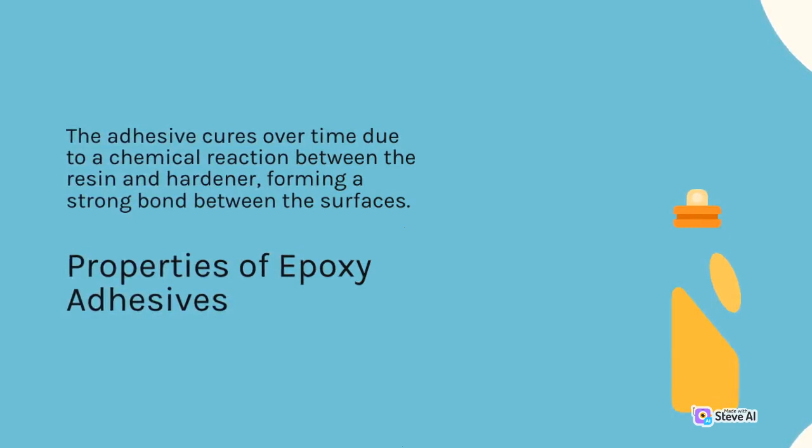Properties of epoxy adhesives. Epoxy adhesives have several properties that make them a popular choice in many applications. These properties include:

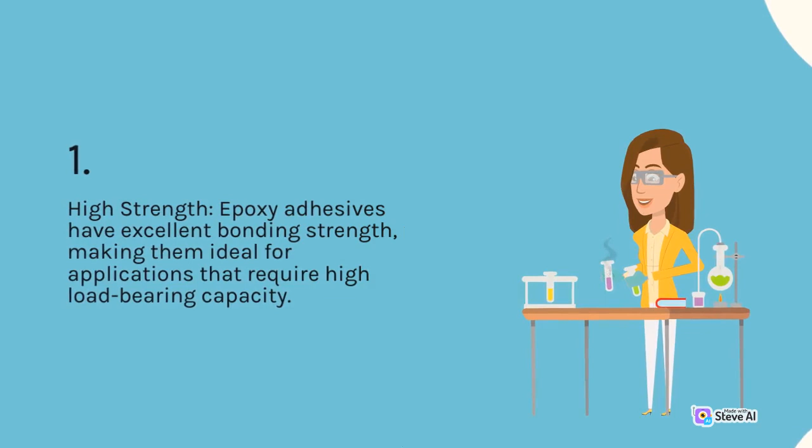1. High strength. Epoxy adhesives have excellent bonding strength, making them ideal for applications that require high load-bearing capacity. 2. Chemical resistance. They are resistant to a wide range of chemicals, making them ideal for use in harsh environments. 3. Durability. Epoxy adhesives are resistant to wear and tear, making them ideal for use in applications that involve repetitive stresses.

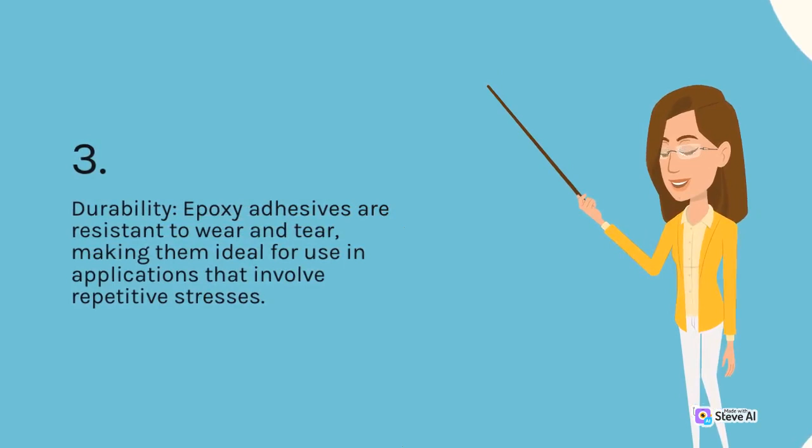4. Excellent adhesion. They have excellent adhesion to a variety of materials, including metals, plastics, and ceramics. 5. Heat resistance. They have high resistance to heat, making them ideal for use in environments with high temperatures.

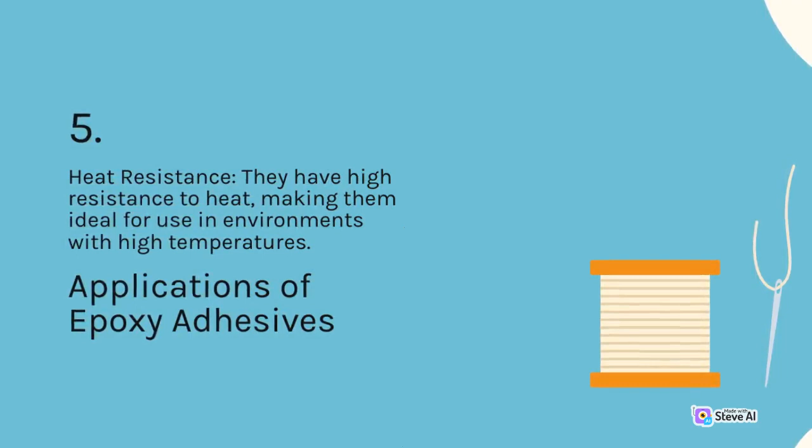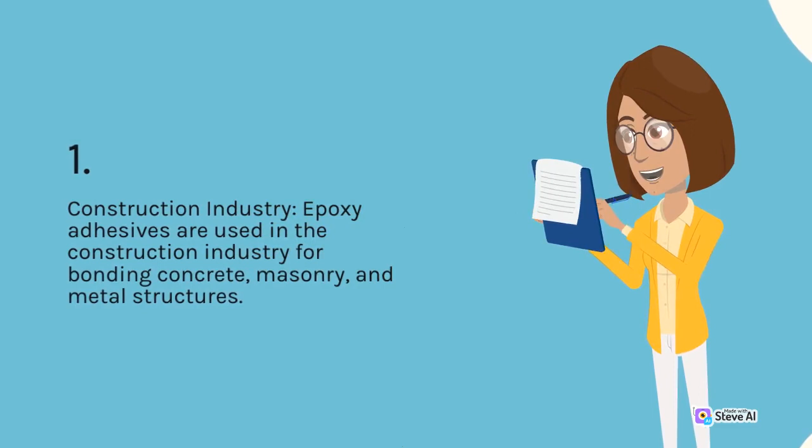Applications of epoxy adhesives. Epoxy adhesives are used in a variety of industries for various applications. Some of the applications of epoxy adhesives are: 1. Construction industry. Epoxy adhesives are used in the construction industry for bonding concrete, masonry, and metal structures. They are also used for repairing cracks in buildings and for bonding tiles and flooring.

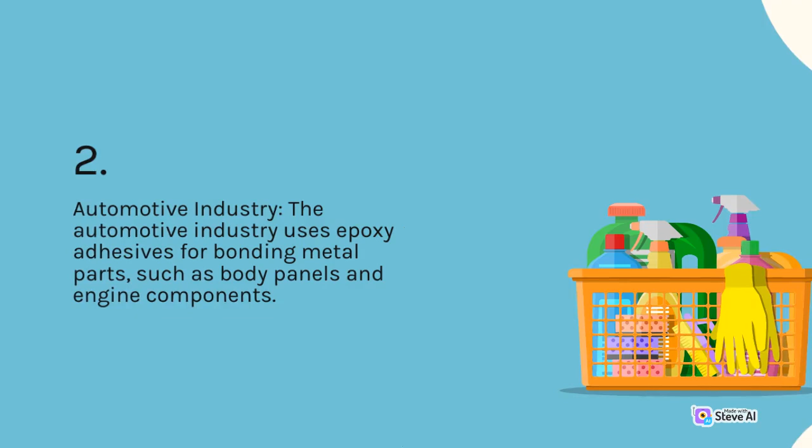2. Automotive industry. The automotive industry uses epoxy adhesives for bonding metal parts, such as body panels and engine components. Epoxy adhesives are also used for repairing damaged plastic and composite parts.

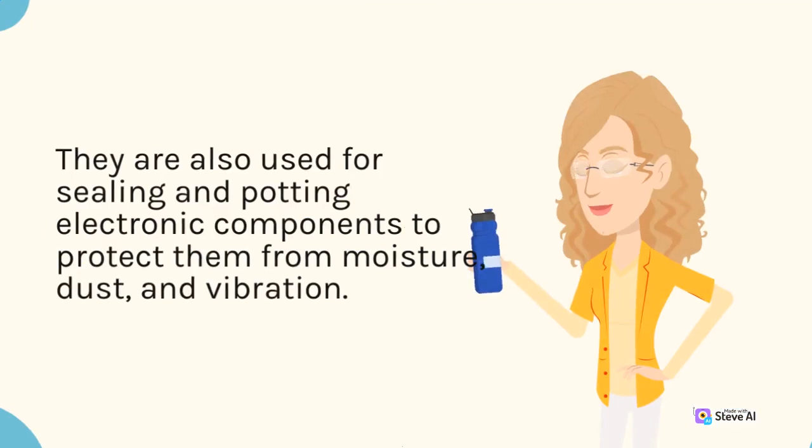3. Electronics industry. Epoxy adhesives are used in the electronics industry for bonding and encapsulation of components and assemblies. They are also used for sealing and potting electronic components to protect them from moisture, dust, and vibration.

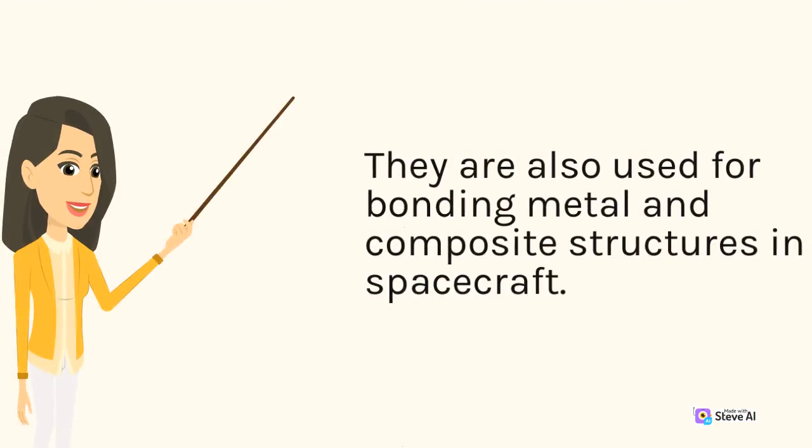4. Aerospace industry. Epoxy adhesives are used in the aerospace industry for bonding and repairing composite materials used in the construction of aircraft components. They are also used for bonding metal and composite structures in spacecraft.

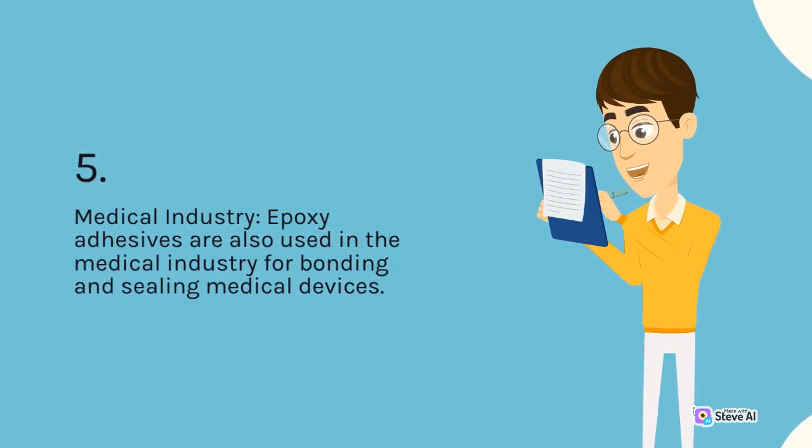5. Medical industry. Epoxy adhesives are also used in the medical industry for bonding and sealing medical devices. They are also used for implantable medical devices, such as joint replacements.

6. Marine industry. Epoxy adhesives are used in the marine industry for bonding and repairing boats, ships, and other marine structures. They are also used for bonding underwater structures, such as pipelines and oil rigs.

Types of epoxy adhesives. There are various types of epoxy adhesives available in the market, which are designed for specific applications. Here are some of the common types of epoxy adhesives.

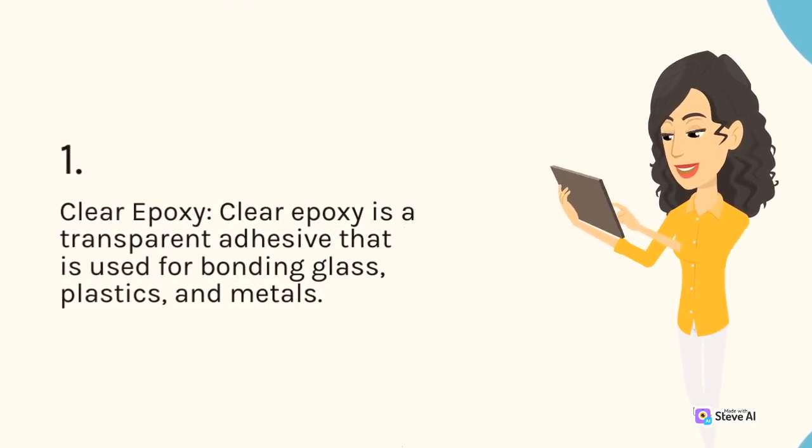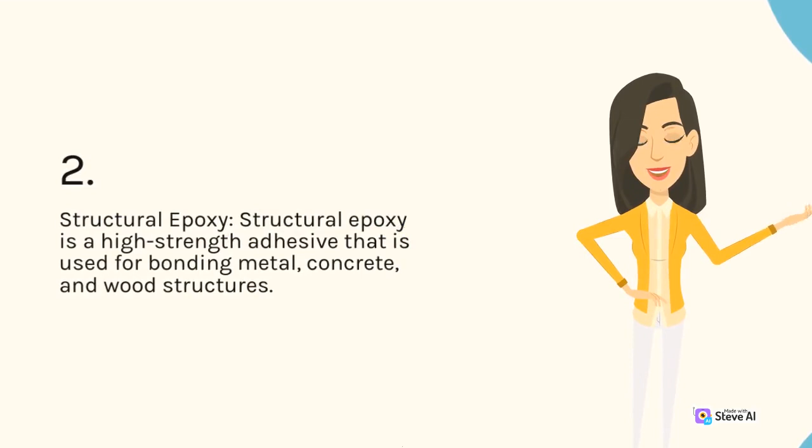1. Clear epoxy. Clear epoxy is a transparent adhesive that is used for bonding glass, plastics, and metals. 2. Structural epoxy. Structural epoxy is a high-strength adhesive that is used for bonding metal, concrete, and wood structures. 3. Rapid cure epoxy. Rapid cure epoxy is a fast-setting adhesive that is used for bonding metals, plastics, and ceramics.

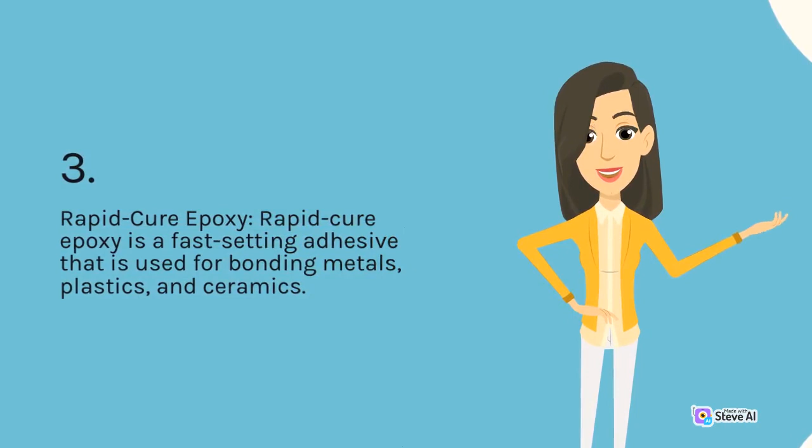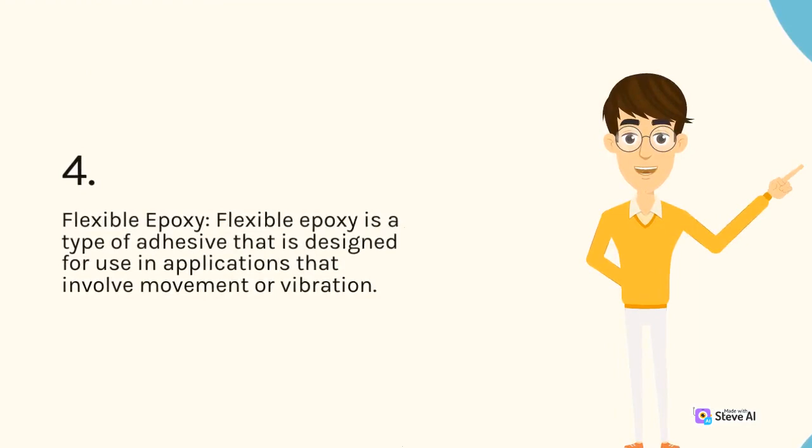4. Flexible epoxy. Flexible epoxy is a type of adhesive that is designed for use in applications that involve movement or vibration. It is used for bonding materials that are subjected to repeated stress, such as rubber, plastics, and metals.

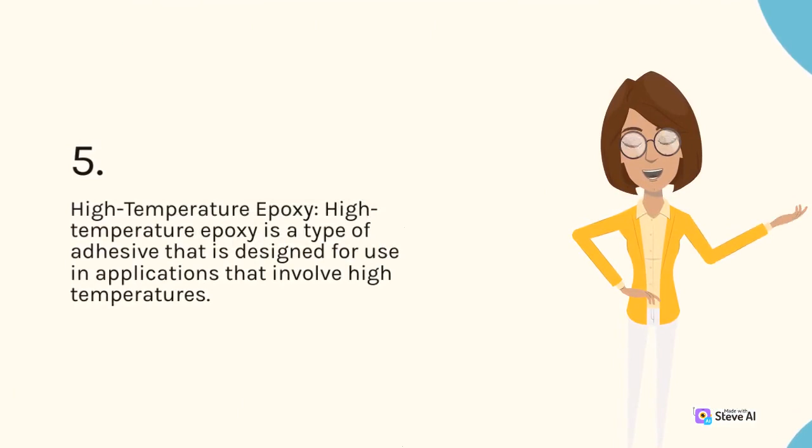High-temperature epoxy is a type of adhesive designed for use in applications that involve high temperatures. It is used for bonding materials that are subjected to extreme heat, such as metals and ceramics.

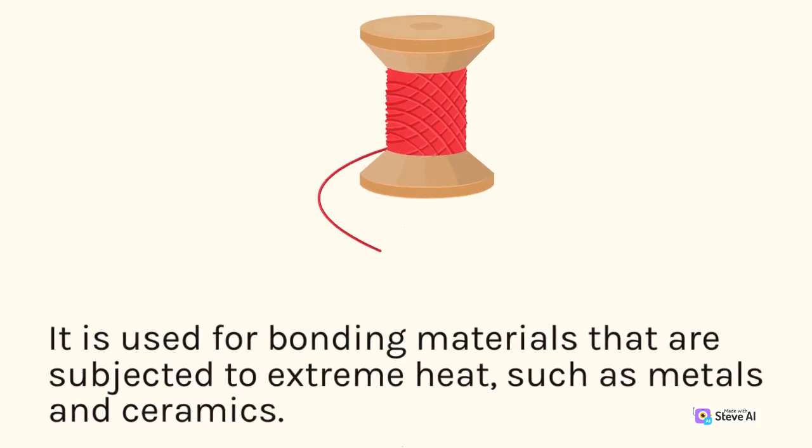How to apply epoxy adhesives. The application of epoxy adhesives depends on the specific adhesive being used and the surfaces being bonded. Here are some general steps for applying epoxy adhesives.

1. Prepare the surfaces to be bonded by cleaning and drying them thoroughly. 2. Mix the required quantities of resin and hardener according to the manufacturer's instructions. 3. Apply the adhesive to one of the surfaces to be bonded, using a brush, roller, or syringe. 4. Place the other surface to be bonded onto the adhesive, making sure that the bond line is uniform.

5. Clamp the surfaces together until the adhesive is fully cured. 6. Clean up any excess adhesive with a solvent before it hardens.

Additionally, epoxy adhesives offer several advantages over other types of adhesives, such as cyanoacrylates and superglues. For example, epoxy adhesives have a longer working time, which allows for better placement and adjustment of the parts being bonded. They also have a higher gap filling capacity, which means they can fill in any gaps or irregularities between the surfaces being bonded.

Furthermore, epoxy adhesives can be used on a wide range of materials, making them a versatile choice for many applications.

However, there are some limitations to the use of epoxy adhesives. For example, they can be brittle and may crack under extreme stress, such as impacts or bending. They can also become discolored over time due to exposure to sunlight and UV radiation.

Furthermore, they can be difficult to remove once cured, making them less suitable for applications that require frequent repairs or adjustments. They offer several advantages over other types of adhesives, including high strength, chemical resistance, durability, and excellent adhesion to different materials.

Whether you work in construction, automotive, electronics, aerospace, medical, marine, or other industries, epoxy adhesives can be an ideal solution for your bonding needs.

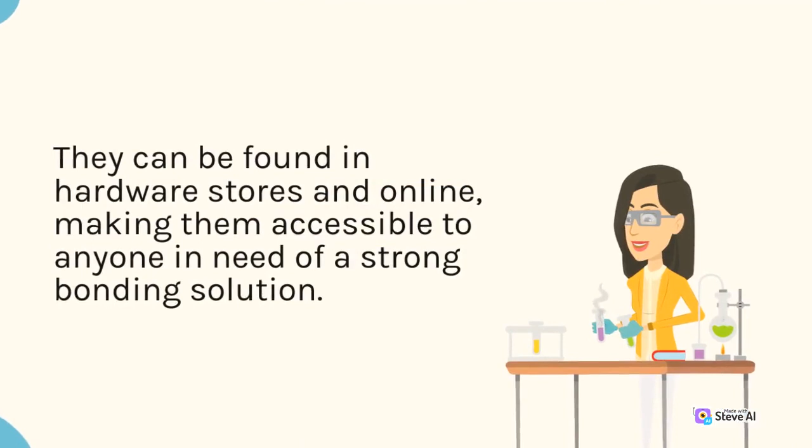It is also worth noting that epoxy adhesives are not only used in industrial and commercial applications but can also be used in DIY projects and home repairs. They can be found in hardware stores and online, making them accessible to anyone in need of a strong bonding solution.

When using epoxy adhesives in DIY projects, it is important to choose the right type of adhesive for the job. In addition, it is important to follow proper handling and application procedures, such as using appropriate protection, measuring the resin and hardener accurately.